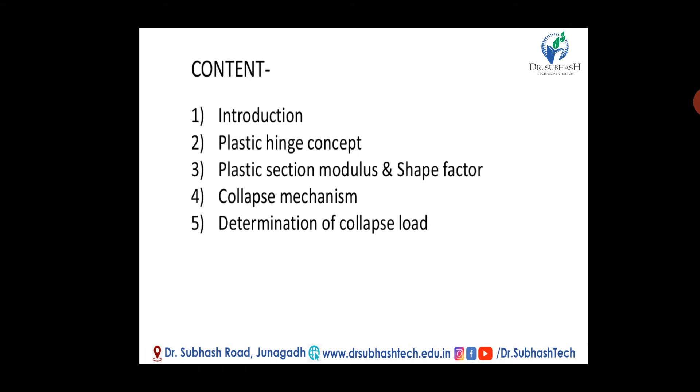In the elastic method of design, also termed as working stress method or allowable stress method, stresses and deformations are computed at working load using elastic properties of steel. The working stress design limits the structural usefulness of steel by allowing permissible stresses which are below the elastic limit, called yield stress, and it is taken as the design criteria.

In the plastic method of design, the ultimate load is taken as the design criteria, and hence a structure designed using the working stress method may be heavier than one designed by the plastic method.

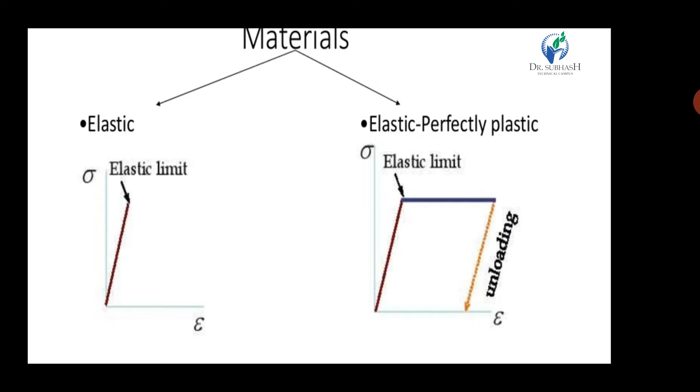That's why in the new code, after the revision of IS 800, the plastic design has been introduced for material safety. You can see the graph of elastic-perfectly-plastic behavior and the elastic limit. After that it remains constant, and when considering unloading conditions we use the plastic state.

Now, the next slide covers assumptions. There are some assumptions to achieve the plastic state or yield stress before load failure. First, the material obeys Hooke's law till the stress reaches fy.

Second, the yield stress and modulus of elasticity have the same value in compression and tension. Third, the material is homogeneous and isotropic in both elastic and plastic states. Fourth, plane transverse sections remain plane even after bending, and the effect of shear is negligible. The cross section of the beam is symmetric about the axis through its centroid, parallel to the plane of bending.

The influence of normal and shear force on the plastic moment is not considered, and there is no resultant axial force on the beam. The material is assumed to be sufficiently ductile to permit large rotation of the section to take place, and finally, no instability occurs in any member of the structure up to collapse.

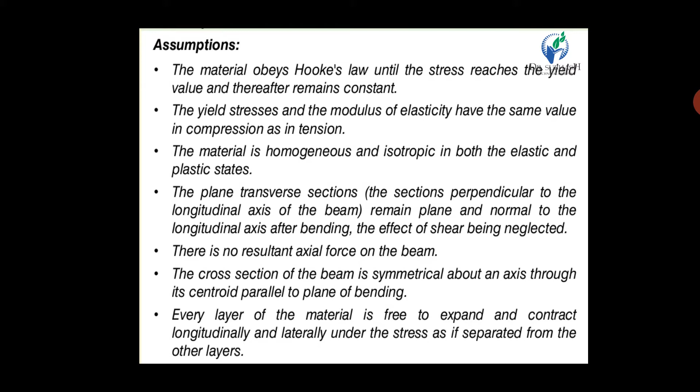So the cross section of the beam is symmetric about the axis through the centroid and parallel to the bending, and every layer of material is free to expand and contract longitudinally and laterally under stress, as if separated from the other layers. These are the assumptions that must be satisfied to reach the plastic state.

Now, the process of yielding of a section. Let a cross section increase gradually within the elastic limit; the moment M is denoted by M equals sigma into Z, where Z is the section modulus, generally I by Y. Now, at the elastic limit, the yield stress is reached, denoted as My. So including yield stress, M becomes My, which equals sigma y into Z.

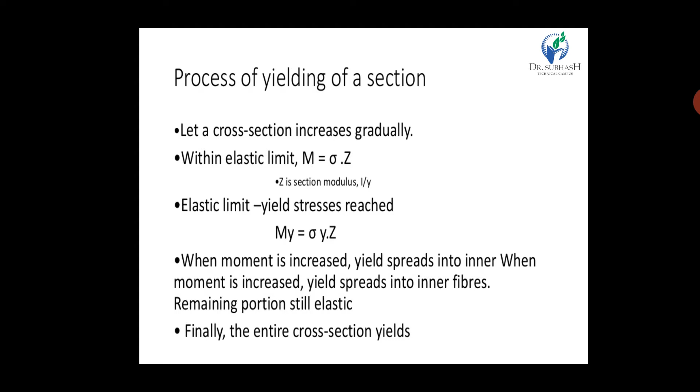When the moment is increased, the yield stress moves into the inner fibers while the remaining portion is still elastic. Finally the entire cross section yields, so we consider the inner fiber as having reached yield stress while the remaining portion is still in the elastic form.

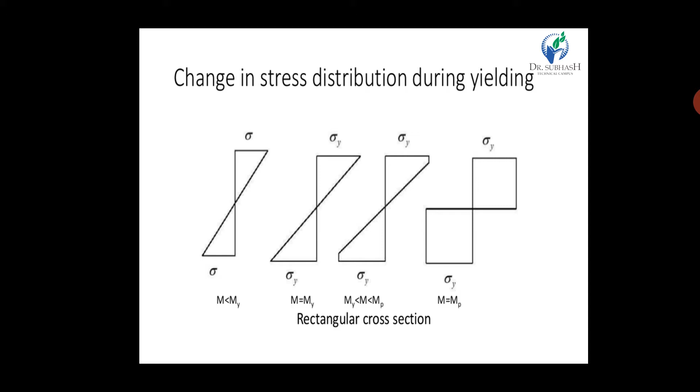So the change in stress distribution during yielding can be seen in the figure. In the first case, M is less than My. Now we increase the moment, at which point M equals My — you can see sigma y, sigma y in the figure. Now we increase the moment again, so My is greater than... rather M is greater than My but less than Mp — you can see that in the figure of distribution.

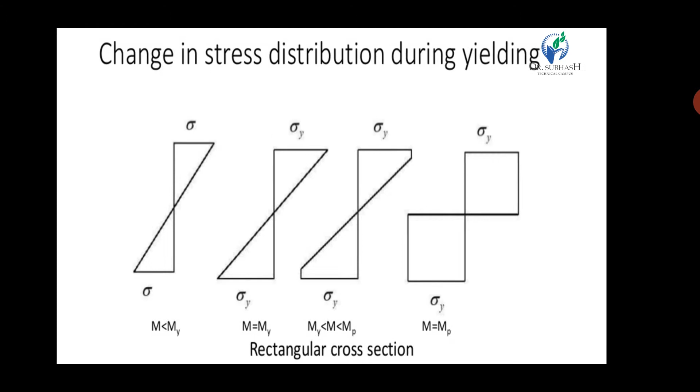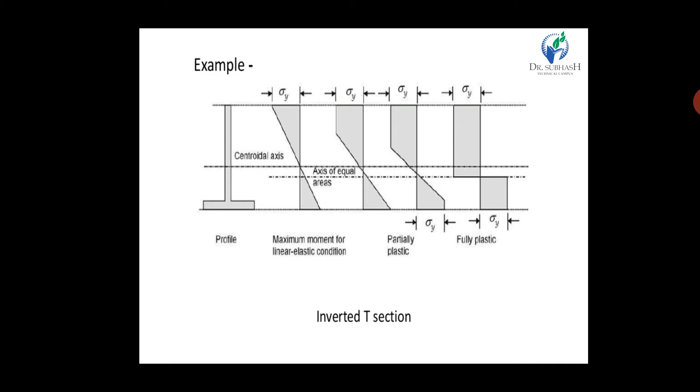Finally, when we reach the plastic moment, denoted Mp, the sigma y in tension and sigma y in compression both have the same shape and pass through this plastic hinge. These are the changes in stress distribution during yielding as we apply or increase the bending moment. Now let's look at an inverted T shape as an example — you can see that profile of the T section.

Now the centroid axis passes through this flange of T. The maximum moment for the linear-elastic condition, you can see sigma y. It should be reached up to the final stage of partially plastic. At that time it should be noted as the axis of equal areas.

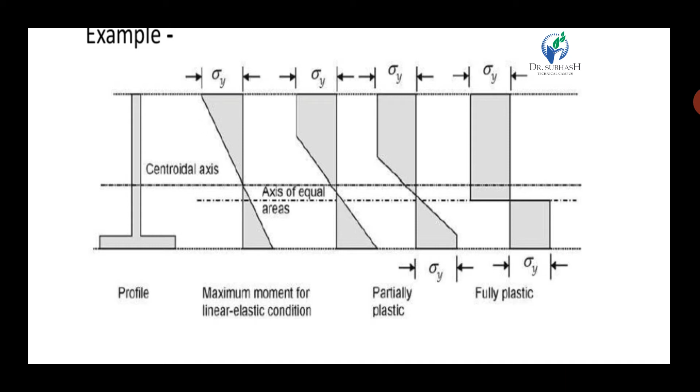But when we achieve the full plastic state, you can see the equal area axis. At that axis, both the area of tension and compression are equal. So in this process, we can allow the full plastic state. This is the example of an inverted T-beam.

Now what is the plastic hinge concept? When the section is completely yielded, the section is fully plastic. So when we completely achieve the yield stress, automatically our section is fully plastic.

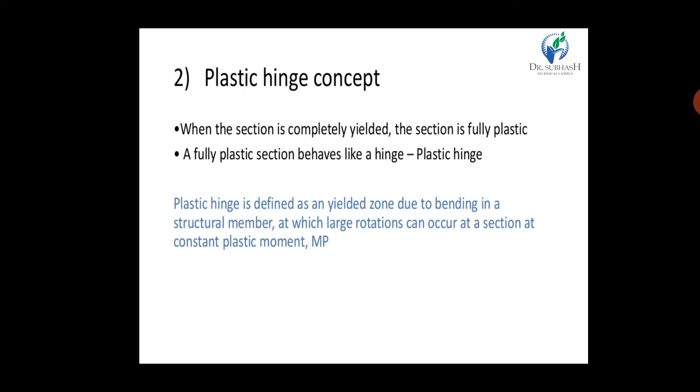So fully plastic section behaves like a hinge, or plastic hinge. We know that plastic hinge is defined as the yielding zone due to bending in a structural member, at which large rotation can occur at a section at constant plastic moment MP. So the corresponding bending moment is called the fully plastic moment MP, denoted by Fy into Zp.

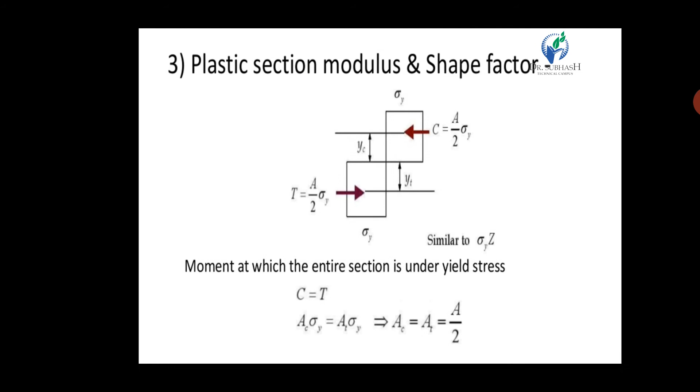Similarly sigma y and Z. Now the moment at which the entire section is under yield stress means we have to achieve the plastic state. At that time both the area of tension and compression are the same. So for the same assumption, we have to take C equal to T. So area of compression into stress in compression is equal to area of tension into stress in tension.

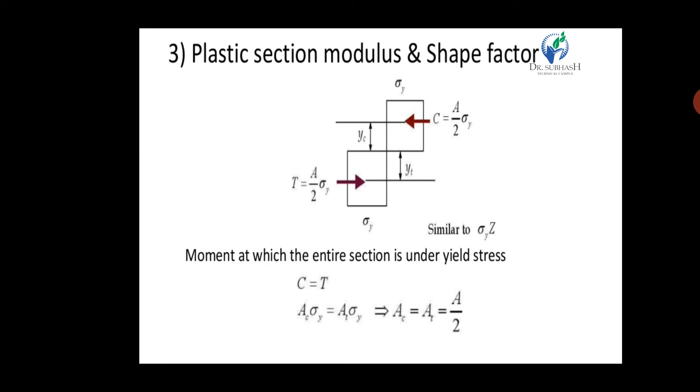So finally you can see the area of compression is equal to the area of tension, A by 2, which is total area divided by 2. This divides the cross section into two equal parts. C equals T equals A by 2 into sigma y. So finally the couple due to A by 2 sigma y equals A by 2 sigma y times yc plus yt, where yc and yt are the centroids of compression and tension.

So we have to take constant sigma y multiplied by Zp, where Zp is nothing but the plastic section modulus. Now how do we calculate the shape factor? After calculating Zp, Zp divided by Z should be greater than 1 — this is nothing but the shape factor.

So the shape factor is a property of the cross sectional shape; it is independent of the material properties. Generally, the shape factor is denoted by plastic moment divided by yield moment.

Now what is the advantage of plastic design? It saves material over the elastic method, resulting in a lighter structure. The design moment can be calculated rapidly. It gives an idea about the types of collapse and the strength of the structure. There is no effect due to change in temperature, settlement support, imperfection, etc. This design is very popular for the design of beams and especially for portal frames.

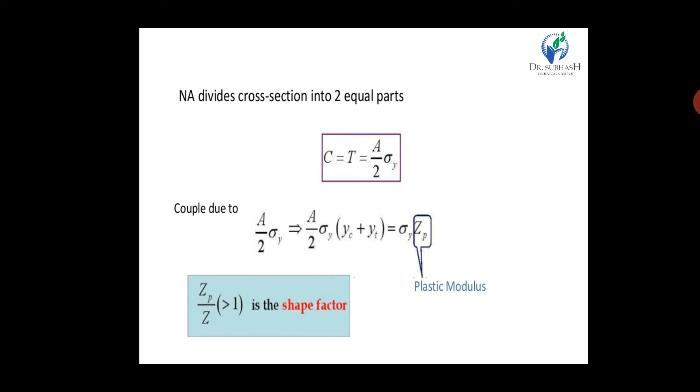Next, shape factor of various cross sections. Now we take a rectangular cross section having depth equal to d and width equal to b. The section modulus Z equals I by y. For a rectangular section, I equals bd cube by 12, and y equals d by 2. So finally we find Z equals bd square by 6.

Now introducing the plastic moment, Zp equals A by 2 times yc plus yt. What is yc? D by 2 into 2, meaning d by 4. Then area should be b into d divided by 2, with d by 4 plus d by 4. So finally we get Zp equals bd square by 4.

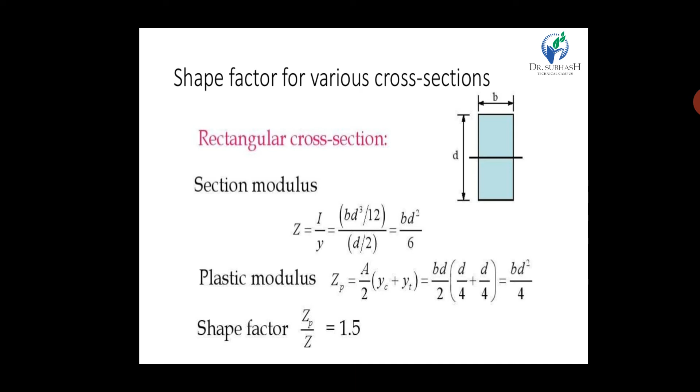Now according to our equation of shape factor, plastic moment divided by yield moment, the shape factor of the rectangular section is 1.5. Likewise, for any circular section you can find out the shape factor — the next example will be the circular section.

So Zp is equal to a by 2, yc plus yt. So pi by 4 d square, pi d square divided by 8, 2d upon 3 pi plus 2d upon 3 pi. It's nothing but your yc and yt. And finally Zp you have to derive as d cube by 6.

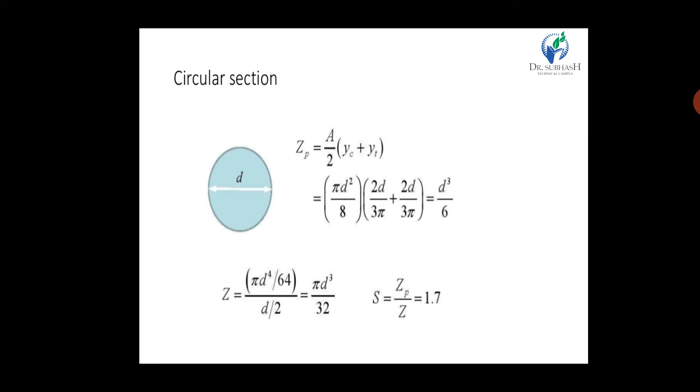So our section modulus should be pi d4 by 64 divided by d by 2. So finally our z is pi d cube upon 32, and when we calculate shape factor zp upon z, it's 1.7 for the circular section.

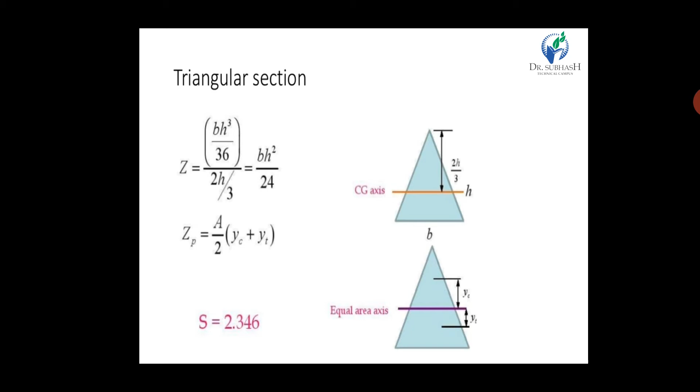Likewise we calculate triangular section, the shape factor should be 2.346. Next, for the I section, the shape factor should be 1.135 and MP should be 59.6 kilonewton into meter.

Now what is collapse mechanism? The beam mechanism: a determinate beam or frame collapses after the first plastic hinge is provided. Now what should be the plastic hinge and when does it occur? The plastic hinge forms in a member at the location of maximum bending moment.

However, at the intersection of two members where the bending moment is the same, the hinge forms in the weaker member. Generally, hinges are located at the distant ends, at the interaction of members, and at the point of load. At the connection involving a change in geometry, we also provide the plastic hinge, and at the point of zero shear in a span loaded by UDL throughout the beam.

So these are where the plastic hinge should occur. So in our first case, beam mechanism, we will provide the plastic hinge below the point load. After providing the hinge, you can see the effect in our figure of what the plastic hinge does.

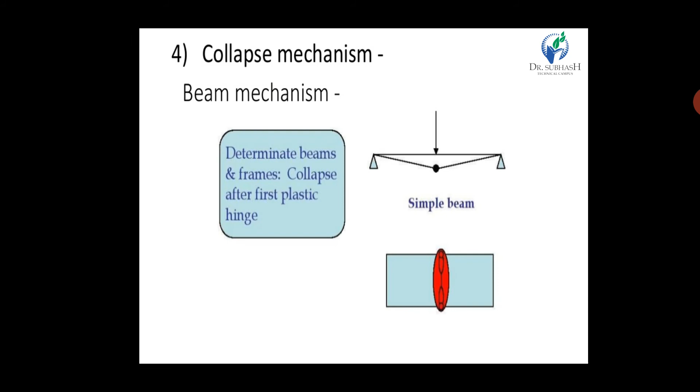Next, for an indeterminate beam and frame, more than one plastic hinge is needed to develop the mechanism. If our beam is indeterminate, we should provide more than two plastic hinges: one at the maximum bending moment, below the point load, and two at the different ends. So the plastic hinge develops at the ends first, the beam becomes a simply supported beam, and the plastic hinge develops at the center for beam mechanism, or beam collapse.

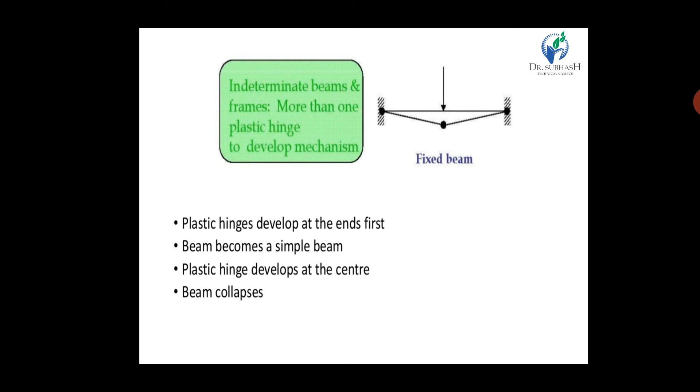Now for an indeterminate beam, more than one plastic hinge is needed to develop the mechanism. For that we should take the propped cantilever beam. The plastic hinge develops at the fixed support first, making it a simple beam, and the plastic hinge develops at the center, causing beam collapse.

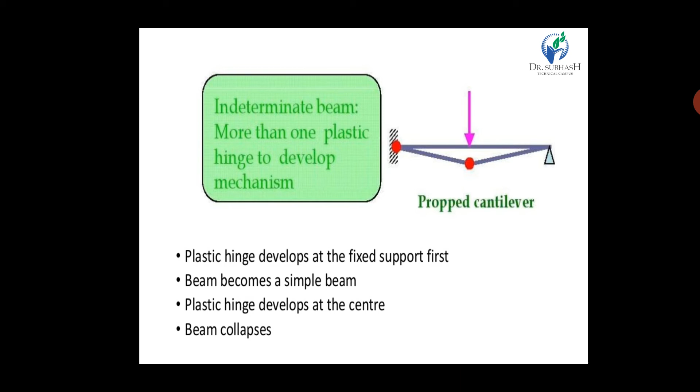So we provide the plastic hinge at the fixed support, converting our beam into a simple beam, and then we provide another at the center where the maximum bending moment occurs. Same way for the panel mechanism, or you can say the sway mechanism.

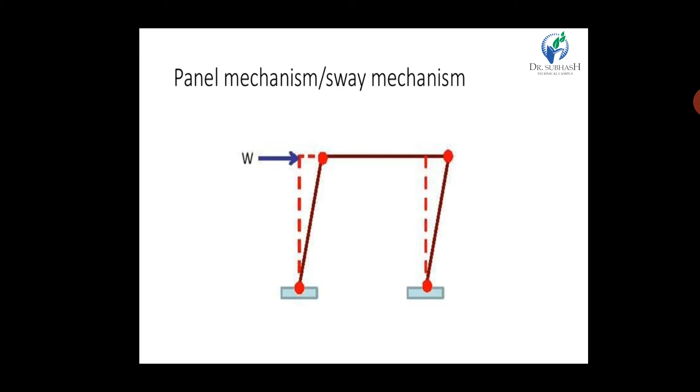So we can show in the previous slide where the plastic hinge occurs, at the interaction and connection between two members. So we should provide hinges at both ends and between the beam column junction. So four hinges should be provided for the sway mechanism.

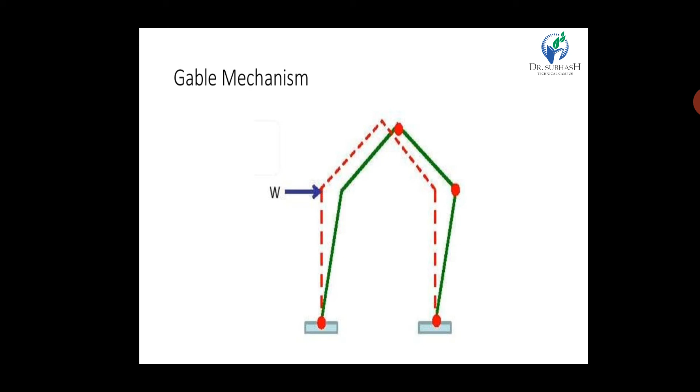Same way we provide hinges in a gable mechanism for the truss, and we analyze the hinges for plastic analysis. Now, method of plastic analysis.

The first one is the static method, or equilibrium method. In the lower bound method, a load is computed on the basis of an assumed equilibrium bending moment diagram in which the moments are not greater than Mp, and is always less than or at worst equal to the true ultimate load.

This should be satisfied. Now the second case is the kinematic method, or mechanism method, also called virtual work. The work performed by the external loads is equal to the internal work absorbed by the plastic hinges. In this upper bound method, a load computed on the basis of an assumed mechanism is always greater than or at least equal to the true ultimate load.

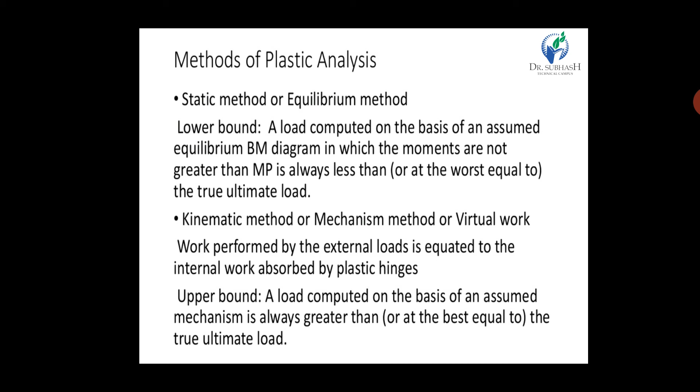So these are the two methods used in plastic analysis: the static method and the kinematic method, corresponding to the lower bound theorem and the upper bound theorem. These are the two types of methods for introducing the plastic hinge.

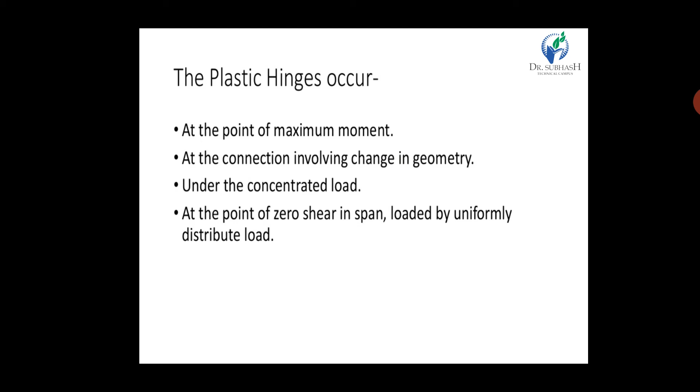Now, where the plastic hinge occurs will be discussed: at the point of maximum moment, at the connection involving a change in geometry (for example, I or 2I), under the concentrated load, and at the point of zero shear in a span loaded through uniformly distributed load.

Now, determination of collapse load. How do we calculate the collapse load? We take a simple beam and provide one hinge below the point load. So our Mp, the plastic moment, is WuL by 4, where Wu means ultimate load. Finally, Wu is 4Mp by L.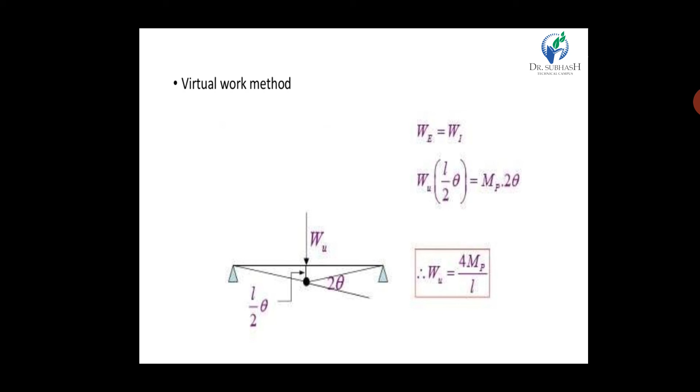So WU is equal to, now you can see we provided the theta hinge at the point of concentrated load, so 2 theta should occur. At that time what should be the virtual work? 1/2 theta. So WU into 1/2 theta is equal to MP into 2 theta. Finally WU, the ultimate load, we will take as 4 MP by L. So by virtual work we identify this MP.

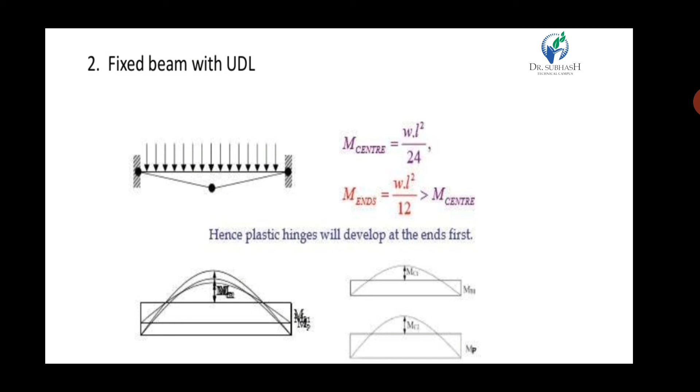Same way for the fixed beam with UDL, we should provide 3 hinges, both at the ends and one at the point of maximum bending moment. So M center should be WL square by 24... wait, M ends should be WL square by 12, which should be greater than M center. Hence plastic hinge will be developed at the ends first. You can see in this figure, first we provide both the ends and the third is provided at the center.

So by equilibrium condition, 2 MP is equal to WU L square by 8. Finally WU is equal to 16 MP by L square.

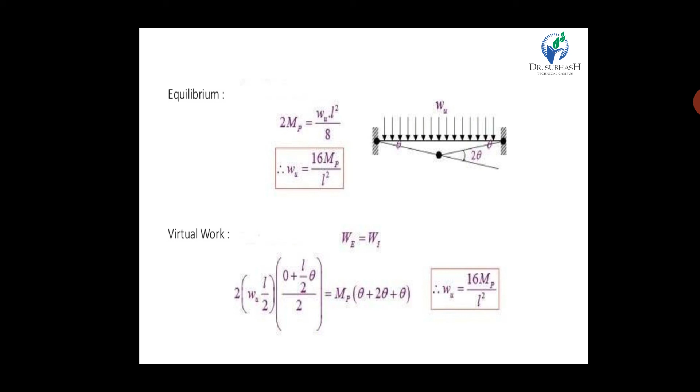Both cases are the same. Either you use equilibrium or static force, or use kinematic or virtual work, both the WU values are same for any case of beam.

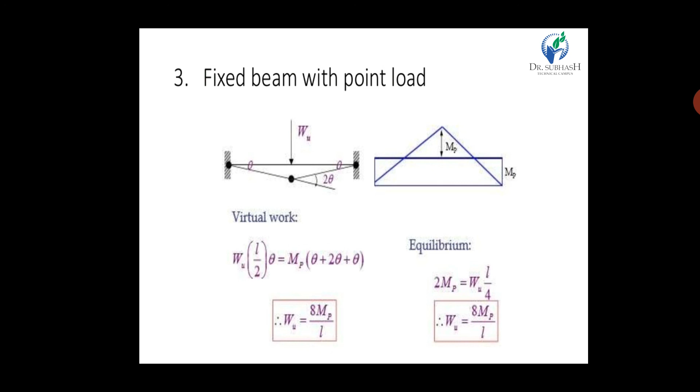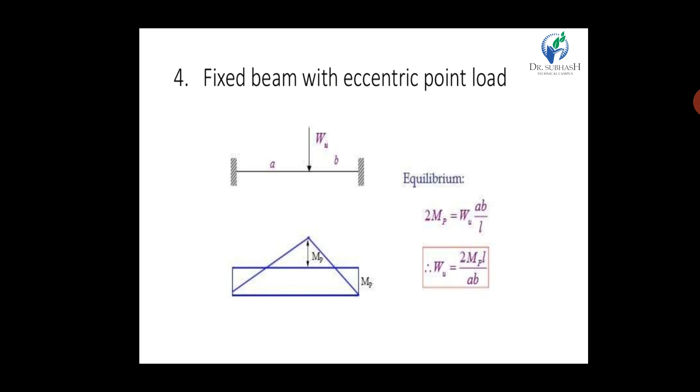Same way, for fixed beam with eccentric point load, WU is equal to 2 MPL divided by AB, where A and B are the projections of the larger and smaller distances related to the ends. Same way we will derive by virtual work, so WU is equal to 2 MPL by AB, the same as the equilibrium condition.

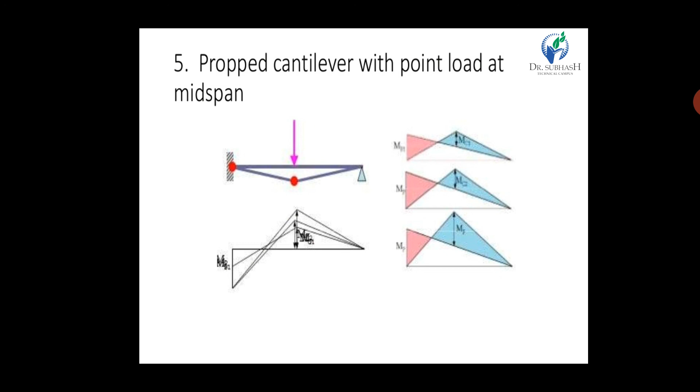Now, propped cantilever with point load at mid span. It should first be converted into a simply supported beam, so one hinge should be provided at the fixed end and the second hinge at the center. So virtual work: WE is equal to external work done is equal to internal work done. WU into 1/2 theta, where theta is for the fixed end and 2 theta for the mid span. The third one is already hinged, so we don't consider theta over that end. Finally WU is equal to 6 MP by L.

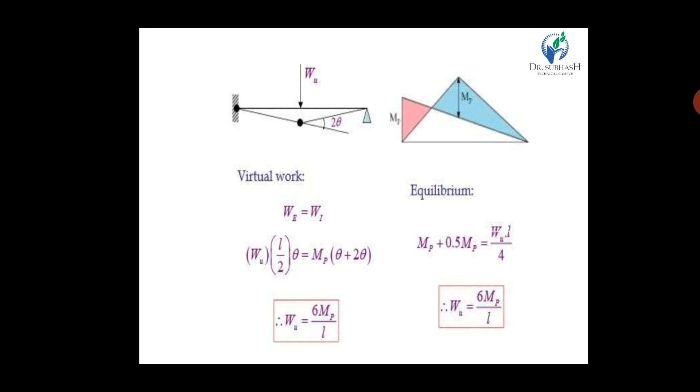So as per my suggestion, the virtual work system is very easy and understandable for finding out the ultimate load. So we always go for virtual work unless it's compulsory to derive the equilibrium condition. We will always use the virtual work principle to find out the collapse load, or you can say the ultimate load of plastic analysis.

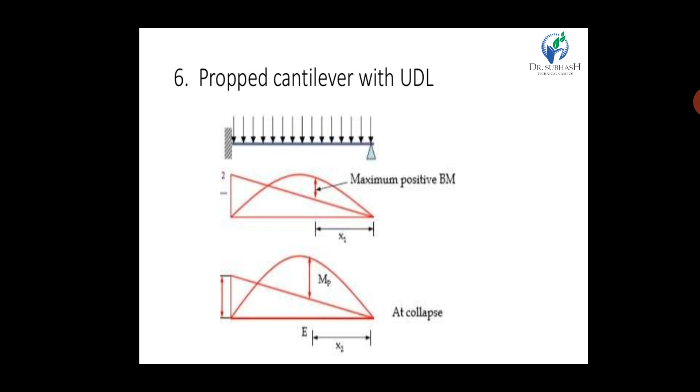Same, sixth one is propped cantilever with UDL. The maximum positive moment occurs nearer to the end, and at collapse load we can find it at x2. So ME equals WU L x2 divided by 2, minus WU x2 square by 2. Finally MP we will discuss in equation 1. For the maximum case we take the derivative with respect to x2, d(ME)/dx2 equal to 0. Finally we get x2 is equal to 0.414 L, and for that WU is equal to 11.656 MP by L square.

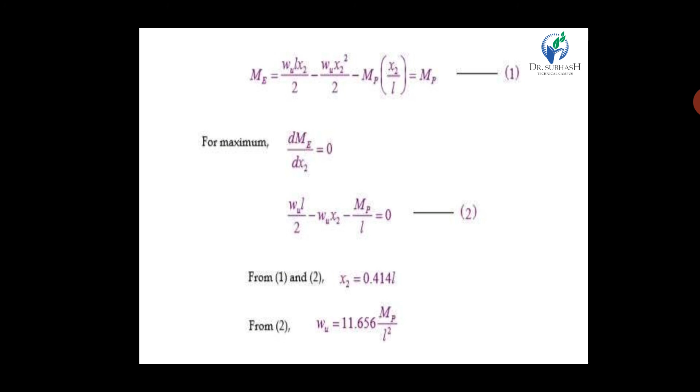So these are the methods to find out collapse load for different sections, but we prefer the virtual work principle. Thank you friends.